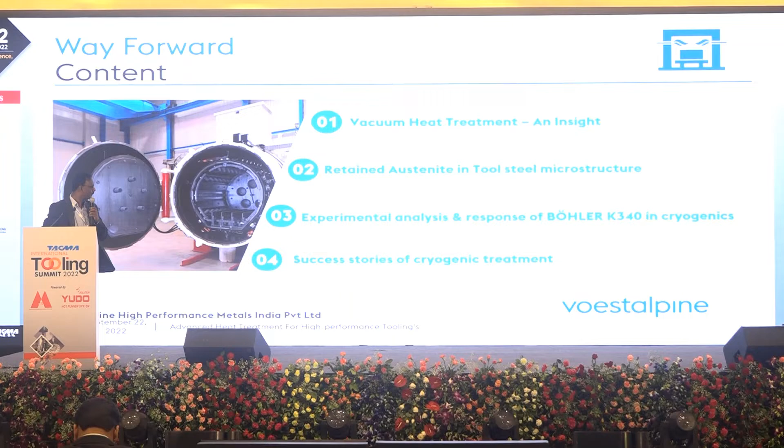When we call it advanced heat treatment, it does not complete at room temperature, it goes to lower temperature, below room temperature, could be hundreds of minus degrees centigrade, which is the cryogenic temperature. Let us go through the first topic of vacuum heat treatment, just an insight.

In this topic, there are certain influential factors I would like to confirm with you about the steel and heat treatment.

The hardenability - we know that we select a tool steel for certain segments, for press tool applications. We have different specifications of hardness based on application requirements. So first of all, the hardenability of the tool steel has to be achieved, the ability of the material to get hardened in this perspective.

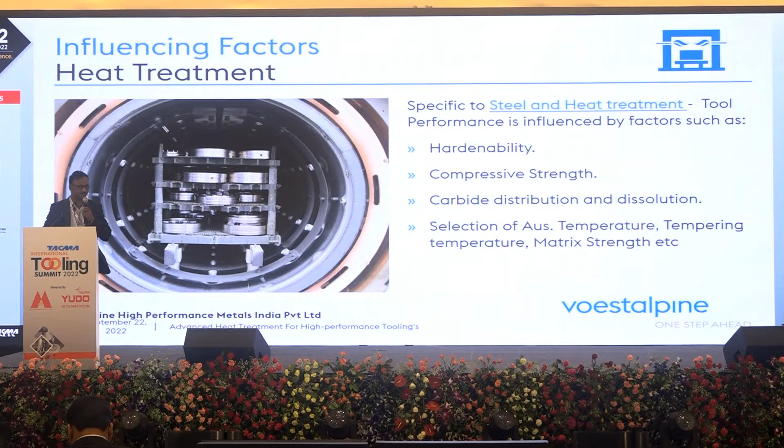Compressive strength of the material is also equally important. And then distribution and dissolution of carbides when we do the heat treatment is also equally important. Of course, last but not least, selection of right parameters is also equally important. These are all the minimum parameters which highly influence your tool performance to demonstrate your products with your customers.

So let us go to the first topic of vacuum heat treatment, an insight. We call heat treatment a special process. We won't call tool manufacturing a special process, but in the tool manufacturing supply chain, heat treatment is a special process.

Why do we call it a special process? It's the process which cannot be quantified in its results when it comes from outward inspection. The results cannot be quantified at the time of dispatch from the heat treatment shop.

We have certain limitations in how to qualify the heat treatment. One thing everyone knows is hardness - if the material has sufficient hardenability, yes, we can achieve the hardness. But it does not limit only to the hardness. So this requires certain validations to complete the total process.

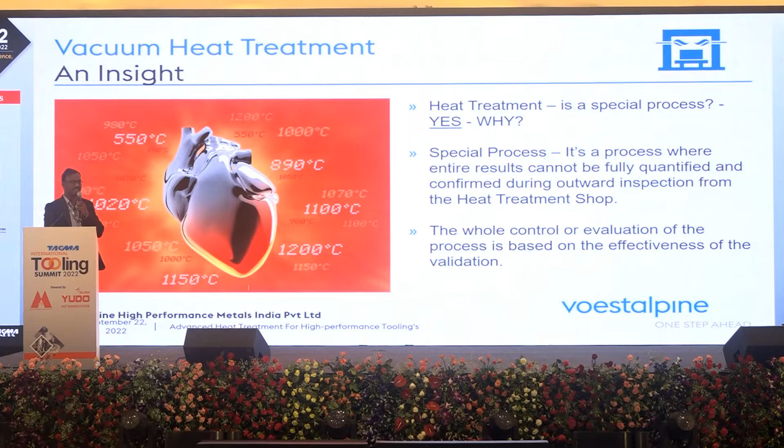Instead of inspection, that needs certain validations. There are 2 types of validations which are normally done when we want to differentiate. One is the furnace validations. There are certain standards and specifications whose details talk about it.

For the tooling industry, we need to make our vacuum furnace within plus or minus 5 degrees centigrade so that temperature uniformity will be there in all locations. Since tool, steel, and tool profile are complex in nature, we have differential thermal expansion when we do the heat treatment.

We need to ensure that the thermal hot box is completely uniform in all perspectives. Of course, there is certain process validation. We have different grades of materials to be heat treated for cold work tool steels and high-speed steels, which have different alloy chemistries. So the final hardness is very important, and we qualify through final hardness and quality of tempered martensite.

If you want to check the heat treatment, you can measure the hardness. If you want to check the microstructure and give it to an external laboratory, once the microstructure achieves 60% of its capability of martensite, they say it's a tempered martensitic structure. But that is not enough to complete the total quality of heat treatment.

Of course, there are certain transformed products, byproducts when we do the heat treatment, which come from austenization to the quenching temperatures. Those byproducts have to be avoided. There are certain byproducts that will be there in the material during heat treatment - that can be there, there is no issue. But there are certain detrimental byproducts which has to be avoided in heat treatment.

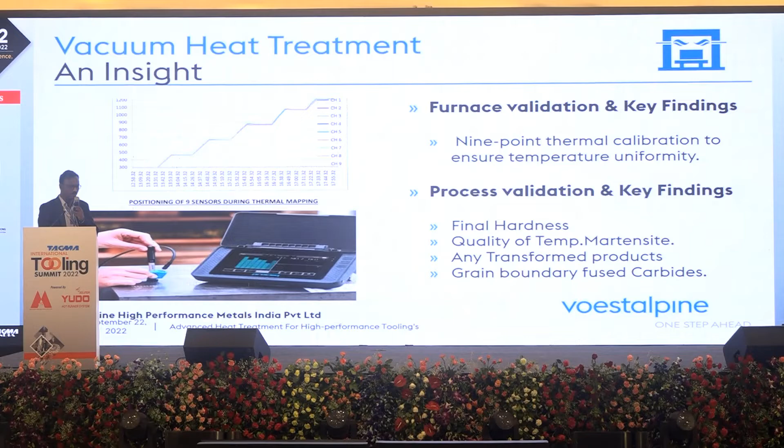Such validations have to be done for the heat treatment, so we don't want to depend upon the inspection process. I'll give you a brief idea about the difference between bad heat treatment and fair heat treatment. Proper heat treatment makes sense. Bad heat treatment, everyone will understand as a layman thought. If there is a deviation in the systems or process, if the parameters were not completely followed as per the recommendation and suggestion, that will lead to bad heat treatment.

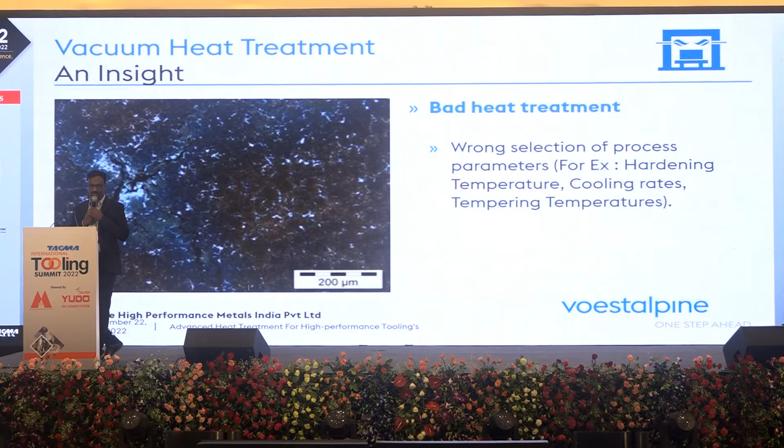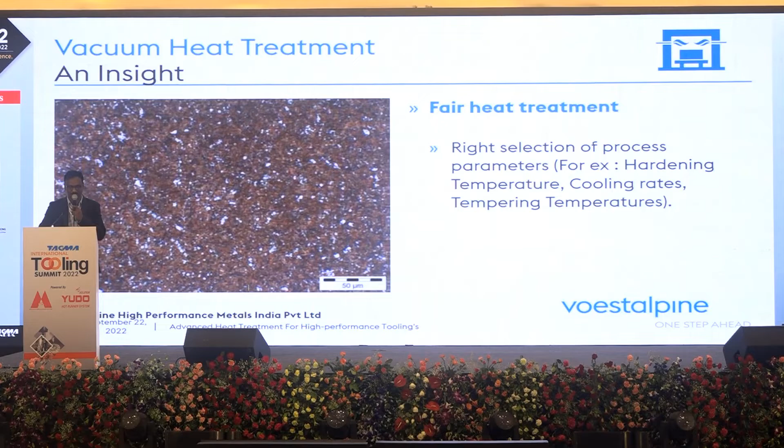And what about fair heat treatment? Here this makes some difference. Right selection of parameters could be fair heat treatment. Then we need to define what could be the right selection of parameters. If the tool steel manufacturer specifies the range of hardening temperatures from 1000 degrees centigrade to 1100 degrees centigrade as a band, for example, you are supposed to do it at 1000, or you can do it at 1100. If you see the microstructure, it gives a clear picture - the total mechanical properties or physical characteristics, whatever it be, will be up to the level and optimum conditions. This is termed as fair heat treatment that everyone knows.

And what could be advanced heat treatment then? What could be the differentiation? It comes not only from the metallurgy, it comes from the tool shop, it comes from the application intent. If you know the technical know-how of the application, accordingly you can choose the hardness, accordingly you choose the process parameters - you will be more choosy about what is the hardening temperature for a particular tool, because a tool is complex in nature.

When it works, for example in press tool applications, there are biaxial stresses, triaxial stresses, shear force, bending moment in drawings. Considering that application perspective, thinking on the application perspective, we would like to arrive at certain temperatures to be fixed for this heat treatment. So if we do such heat treatment, that can be termed as advanced heat treatment.

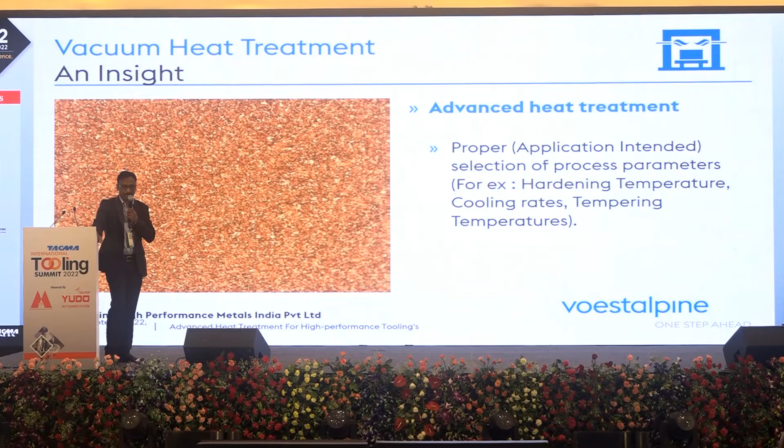At voestalpine High Performance Metals, we do it this way for critical applications - we will be more choosy in selection of hardening temperature. So that's a definition for advanced heat treatment.

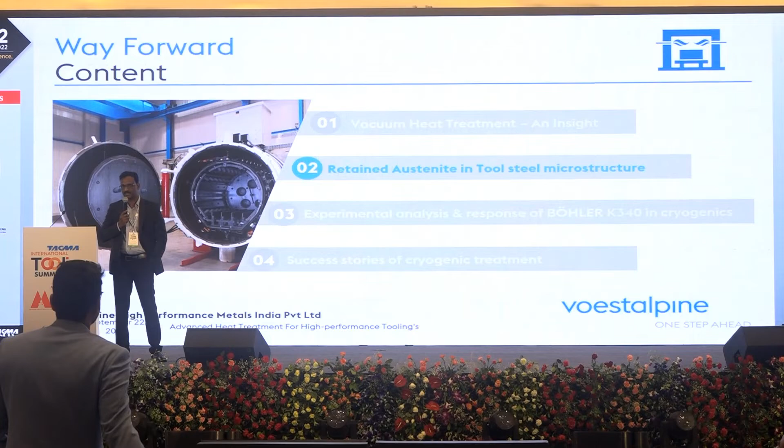As I said, there are certain transformations that will not complete at room temperature - it requires lower temperature to get it complete. And also, there are certain byproducts which could later be detrimental in performance, which could lead to detrimental performance when the tool is working at the press. So those things have to be avoided.

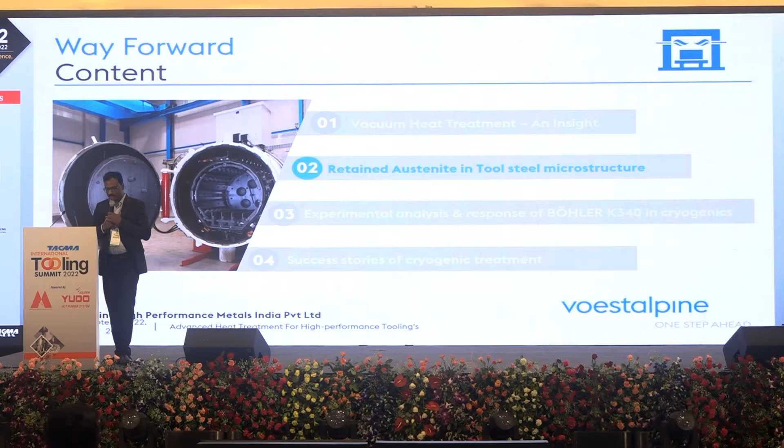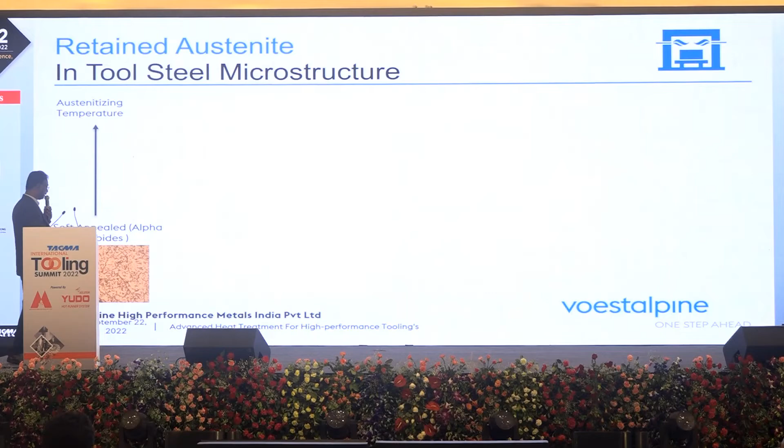Let us talk about something on retained austenite in the microstructure of tool steels. If you see on the left, the soft annealed microstructure at the raw material stage - the condition of ferrite plus alloy carbide - mostly belongs to the 12%, 15%, 20% alloy carbide materials.

Goes up to high-speed steel. If you see BÖHLER S600, BÖHLER S590, S790 - those grades go up to 30% alloy carbides. So the alloy carbides, which are in spheroidized form, plus the ferrite matrix, when you take it to the austenitizing temperature - what will happen? The undissolved primary and secondary carbide will be there.

We require these two guys, primary and secondary carbides, for your tool performance, because the intent is to get out the wear resistance of the materials, and it should be equally and uniformly distributed.

So the saying is, austenite is the phase where we call it the hardening temperature. We take it to that phase temperature, say around 1000 degrees centigrade, maybe up to 1200 degrees centigrade. We have to cool it drastically, as fast as possible. This is a thumb rule for the heat treater: quench as fast as possible.

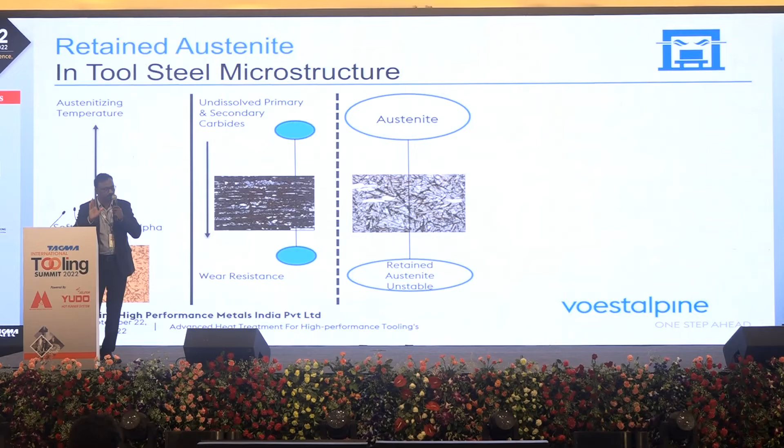So such a fast cooling rate, even in heat treatment, is needed to achieve the final mechanical characteristics. The completion of these phases from austenite to martensite will never take place at room temperature for most cold work tool steels and high-speed steels. There is certain poisonous content, a deterioration which will be detrimental for your application, that stays back - that is called retained austenite.

Now, if you want to improve the performance 15-20% with the same value, with the same effort you made in tool manufacturing, you need to convert this retained austenite into complete martensitic structure. There is a limitation.

How to control it? We need to measure this. How to measure this? There are certain limitations in the measurement. Up to 1 or 2%, we cannot detect - that's below the detection limit. So we should ensure it's reduced to close to 1 or 2% to get the maximum out of it.

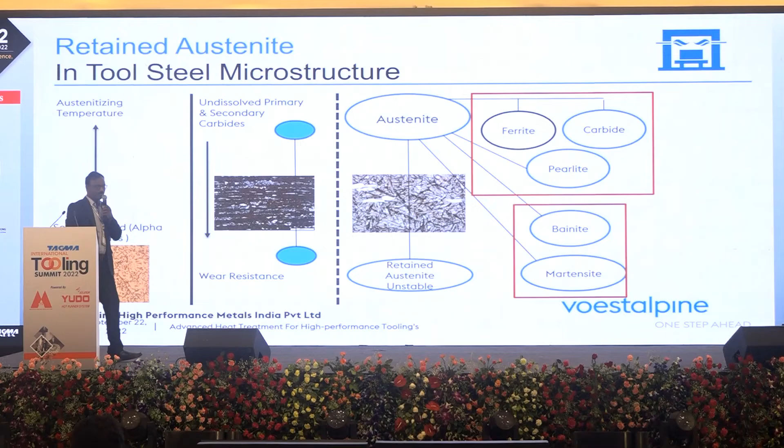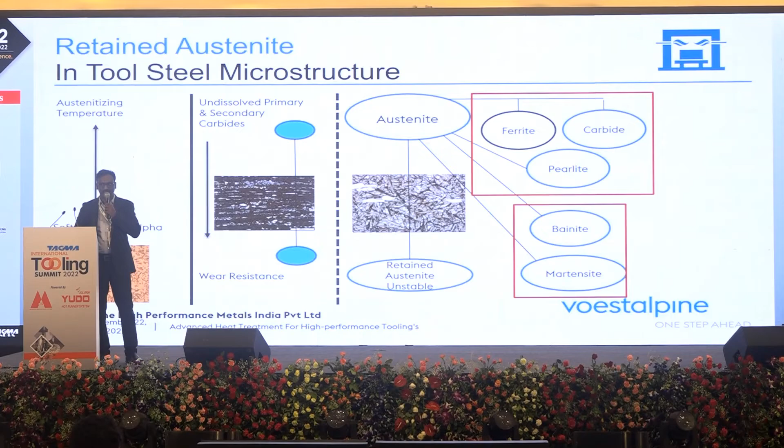So what will happen, as I said, the byproducts - if you cool it too slowly, ferrite and carbide precipitations and pearlitic structure will happen. If you cool a little bit faster, you may end up with certain characteristics of bainite, which could be upper or lower bainite. And if you drastically cool as fast as possible, you can end up with martensitic structure, which is the intended microstructure for our heat treatment.

So that top one could be more soft. That can be useful for further mechanical work in the steel mills, but that may not be applicable for our tool steels.

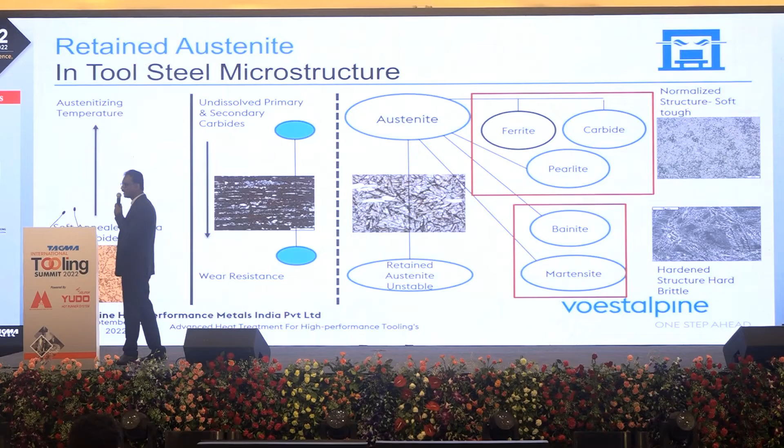So what does the tooling fraternity think about retained austenite? They think there could be some reduction in hardness, lower dimensional stability if they want further value addition like PVD coatings. So they think dimensionally it may not be stable, there will be expansion and contraction because of these poisonous things inside the material, and that may lead to catastrophic failures.

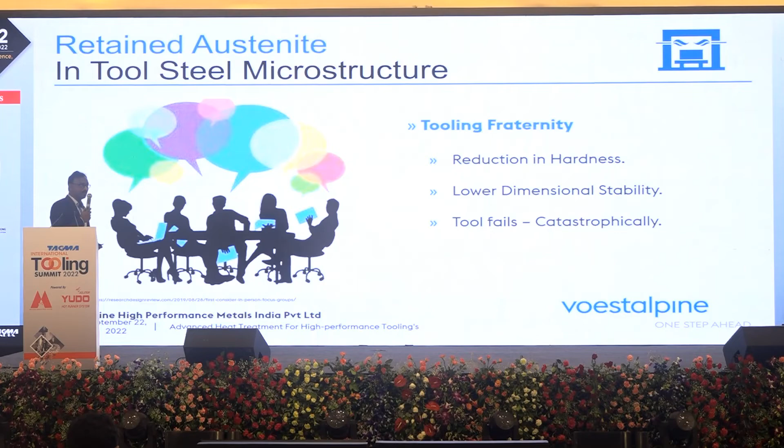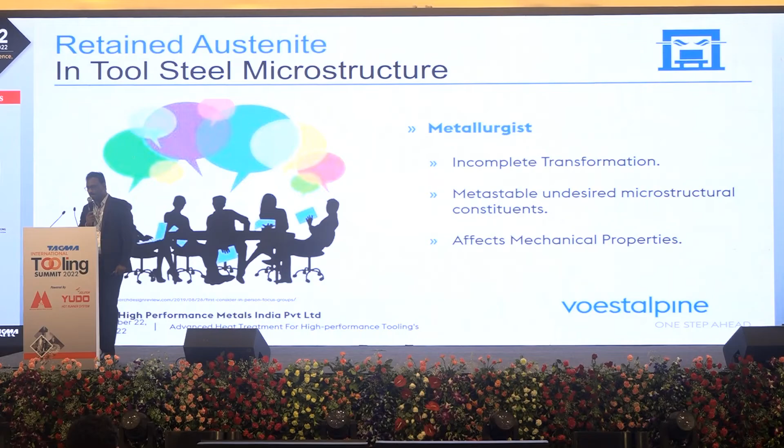What will the metallurgist think in their own way? They say it's an incomplete transformation - there is 10% of retained austenite stayed back, I couldn't convert it, and this is a metastable, unstable retained austenite that can have multifarious functions. Of course, that affects mechanical properties.

The heat treater - finally it comes to the heat treater. The metallurgist says something, the tooling fraternity says the tool may get failure because of heat treatment, having a detection of 5% retained austenite in your tool steel. Then the heat treater will be in trouble. So from the heat treater's perspective, what he will think is how to control or avoid retained austenite. Sometimes it's very difficult.

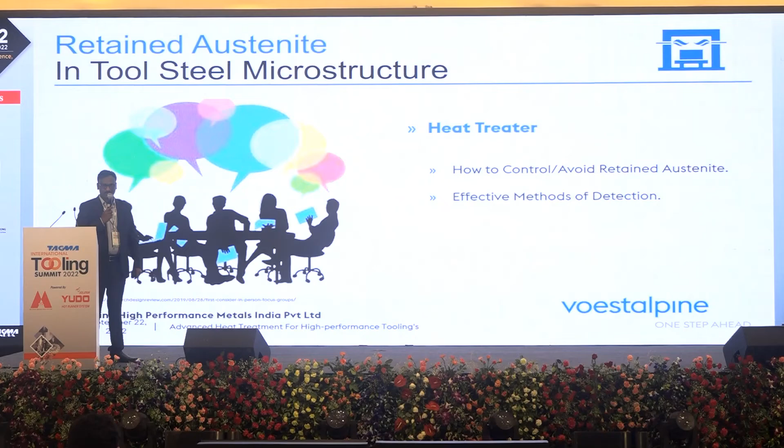We cannot eliminate everything, like antibodies in our bodies. So how to control the retained austenite? How to measure it? This could be the thinking of the heat treater.

Now, the heat treatment is not completed at room temperature. And also we know that the retained austenite is a multifarious component which is detrimental for the application of tool steels or tooling applications. For example, just for your understanding, if you see the picture, BÖHLER K340.

Which has been fairly heat treated at the recommended temperatures - the hardness was 62 HRC, and the retained austenite is close to 3.5%. The proper heat treatment is what I said.

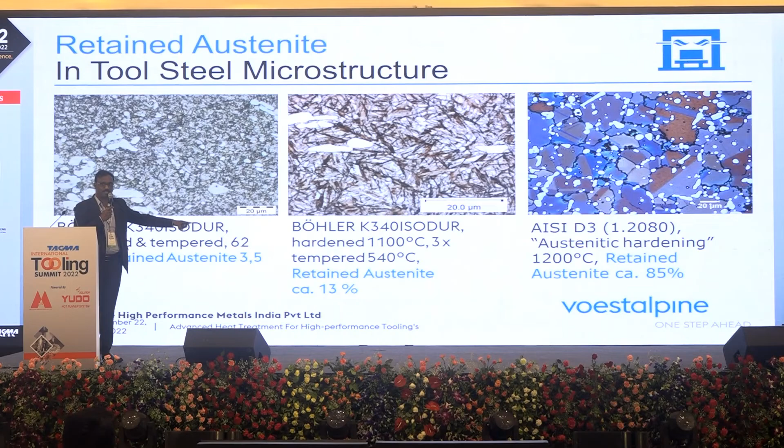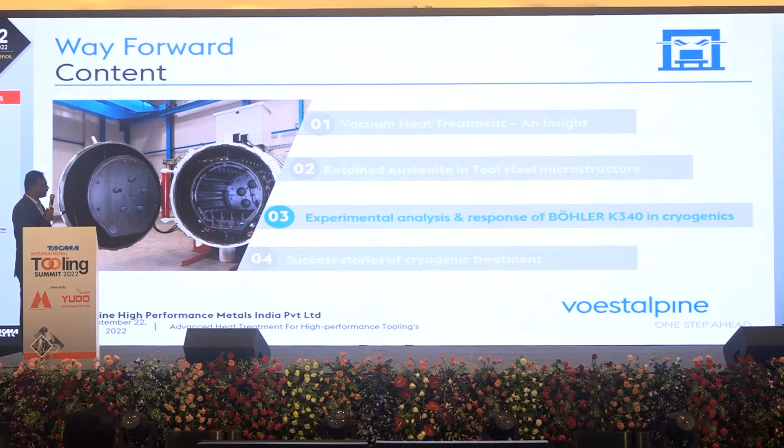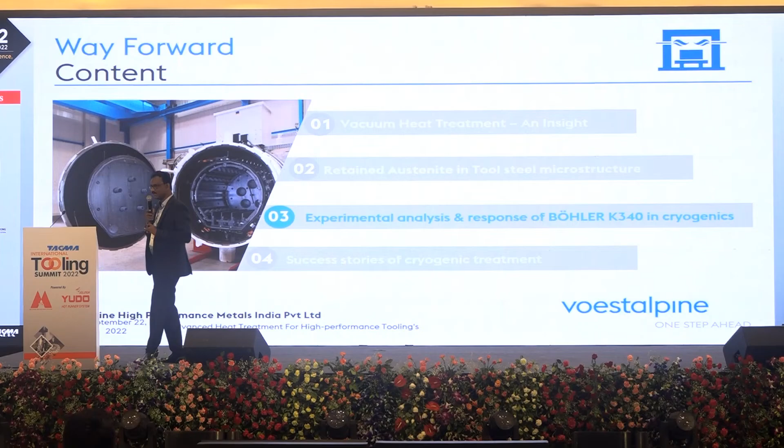Jumping to the third topic: experimental analysis and response of BÖHLER K340. So now we know what advanced heat treatment is, and what the multifarious component in tool steel after heat treatment is - retained austenite. We know retained austenite is detrimental for tooling performance. I'd like to show experimental analysis we've done with Indian Institute of Technology, Mumbai, and how BÖHLER K340 responds to it.

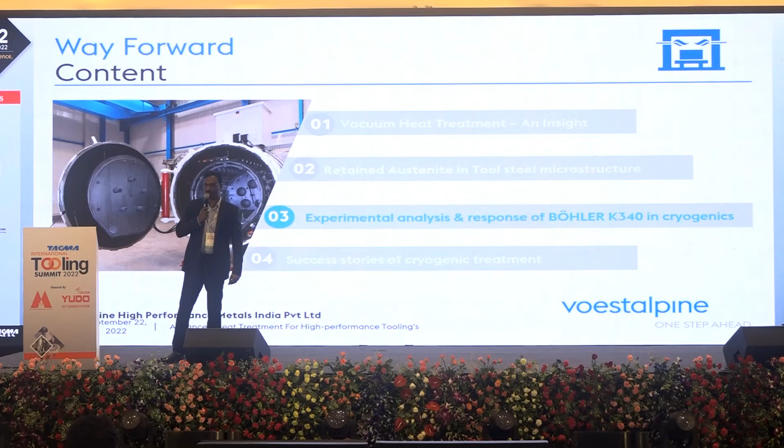Cryogenic treatment is an ultra-low temperature treatment. There's nothing termed as cold in the universe - it's a lack of heat. As we normally say, there's nothing termed as dark - it's the absence of light. In the same way, there's nothing termed as cold, it's an absence, a lack of heat. When the heat goes off, when Q is negative, that's an exothermic reaction. And when Q takes in heat, it's an endothermic reaction. So here everything is exothermic because it's happening at lower temperatures.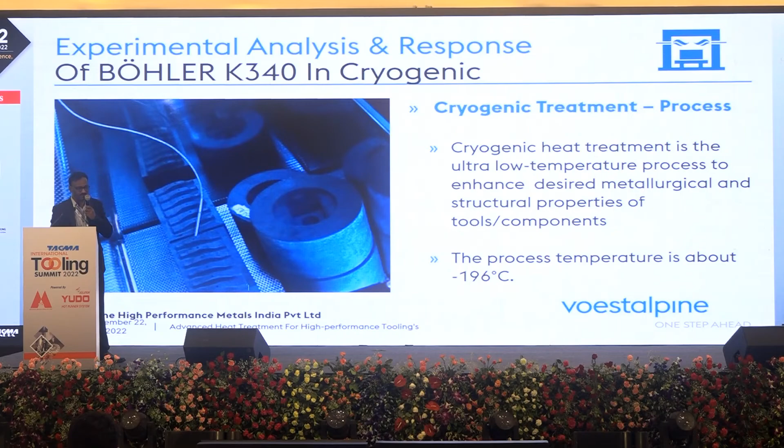If you see the microstructure, this is very generic on both sides - no issues, evenly distributed. If you look closely, there are 'newborn babies' - if you see the microstructure in BÖHLER K340, the white marks arrowed up are the newborn babies resulting from cryogenic treatment at ultra-low temperatures. What it does is improve the cohesiveness of the matrix, increasing the bonding strength so that the carbides become more thermally stable.

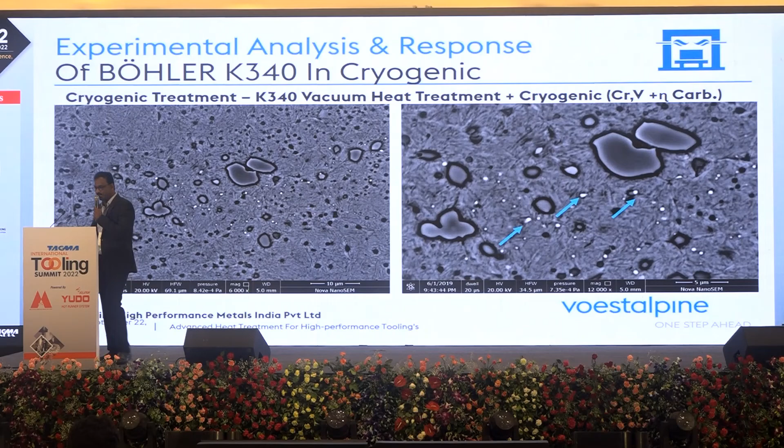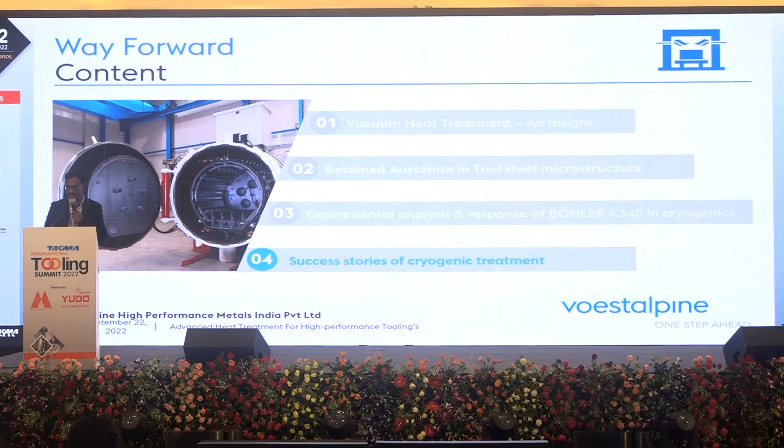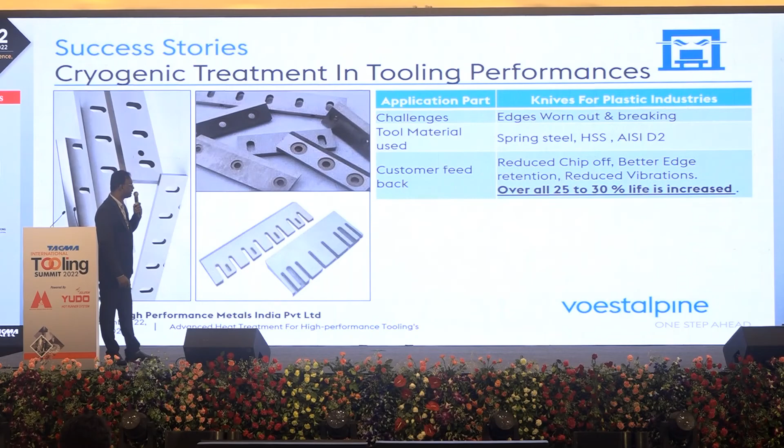Finally, the success stories of cryogenic treatment. If you see the knives, the failure mode is wearing out and breaking - the life performance increased by 25 to 30% by doing cryogenic treatment.

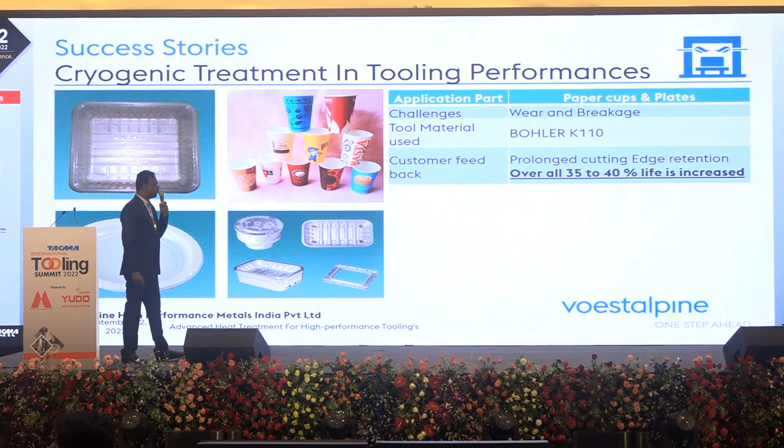This is again from BÖHLER K110. The application is plastic paper cups and plates, where performance increases 35 to 40% with BÖHLER K110. This was a soft gelatin capsule machine, elements made out of AISI D2 and K110, with an overall percentage increase of 25%.

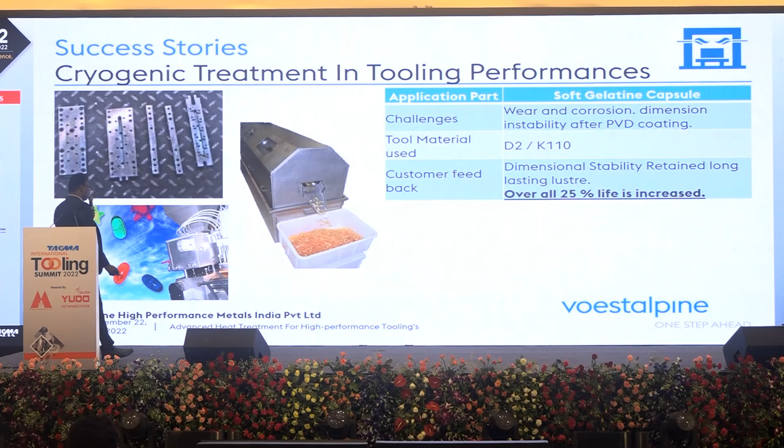Same thing for cutting blades and knives for a different customer. Here's the powder metallurgical version - powder metallurgical BÖHLER S-392 will always give additional performance in the raw material stage and also if properly heat treated. And when we do the cryogenics, it improves by another 20 to 25% of performance.

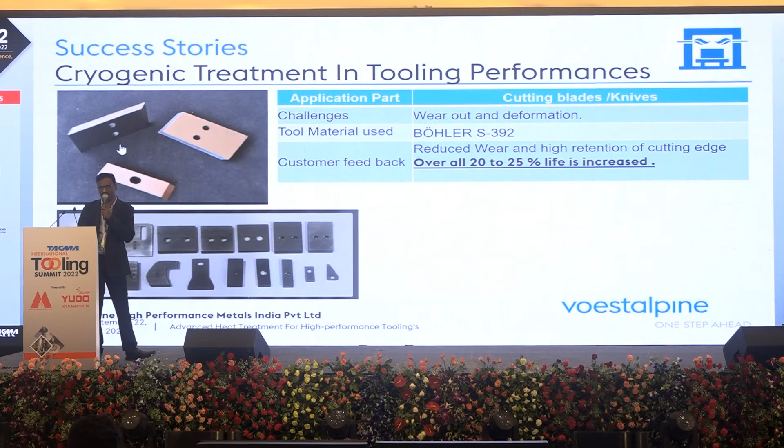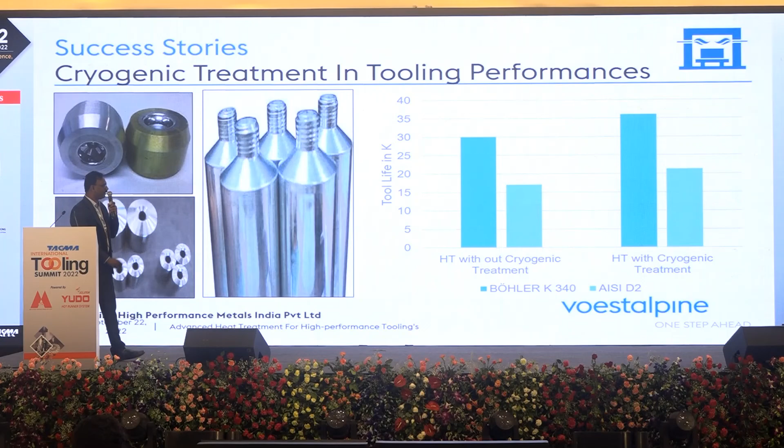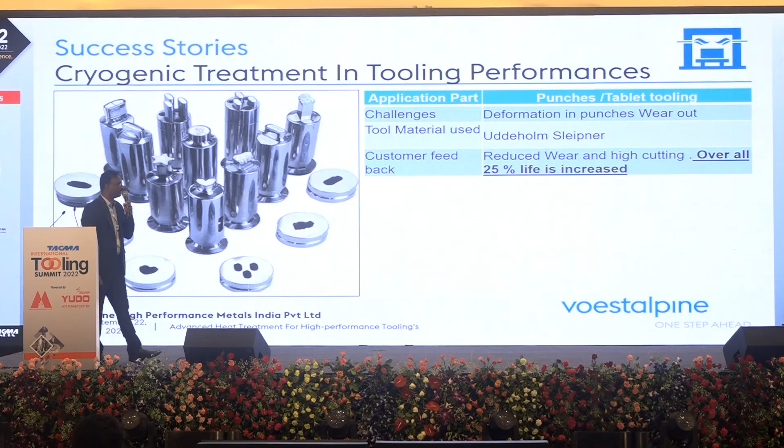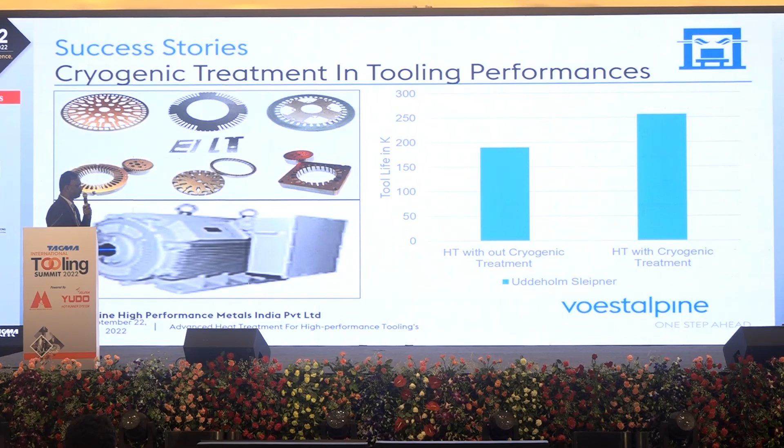Aluminum extrusion dies also have a good case study comparing AISI D2 and K340, around 25 to 30% performance improvement. For tablet tooling, an emerging segment nowadays, they are attempting new premium grades - BÖHLER K340, Vanadis, Sleipner. These materials really improve performance when properly cryogenically treated. There's also a 25% improvement in stamping tools using Vanadis, Sleipner.

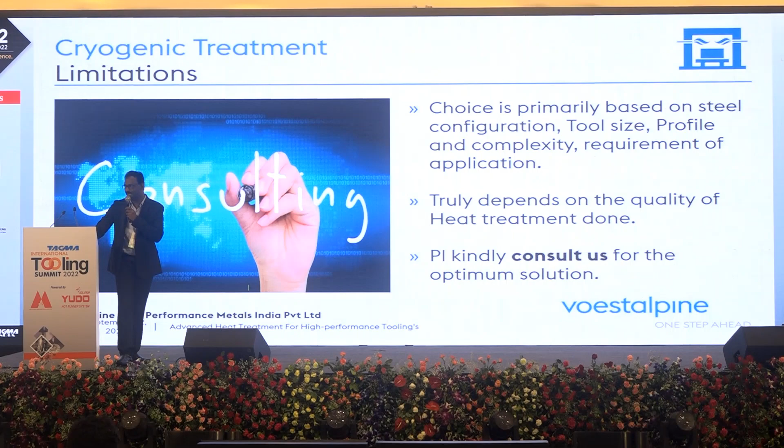Thank you so much for your patience and listening.